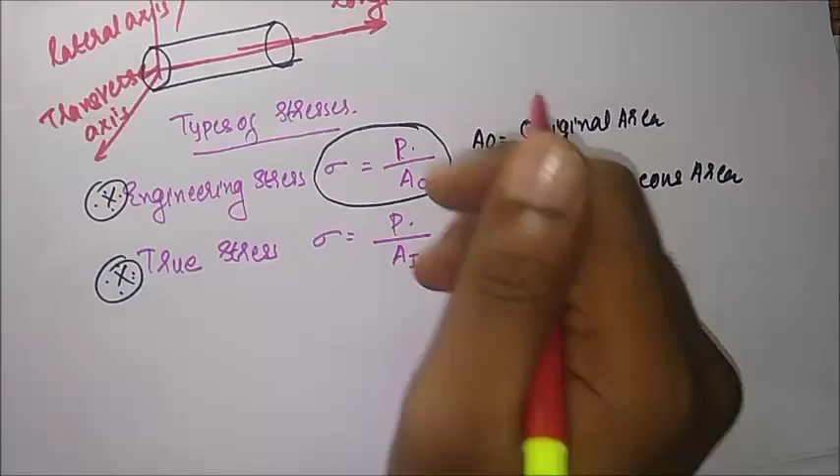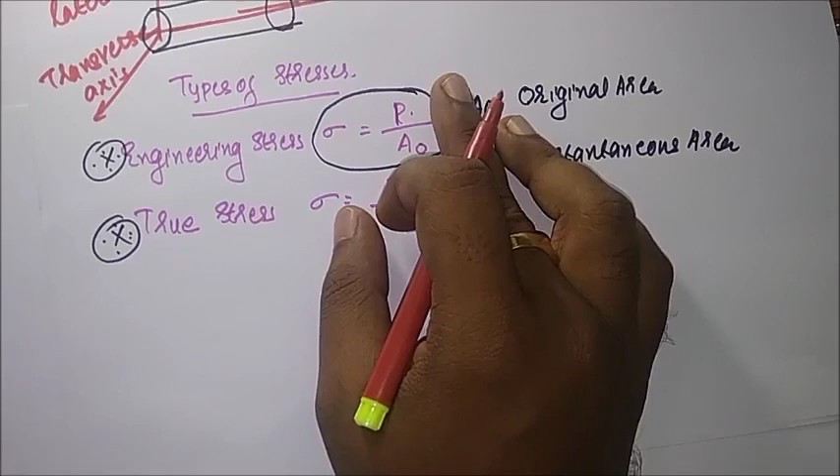In the previous video lecture, we studied what is stress, what is the unit of stress, what is engineering stress, what is true stress, what is the difference between pressure and stress, etc. Today we are dealing with what are the types of stresses.

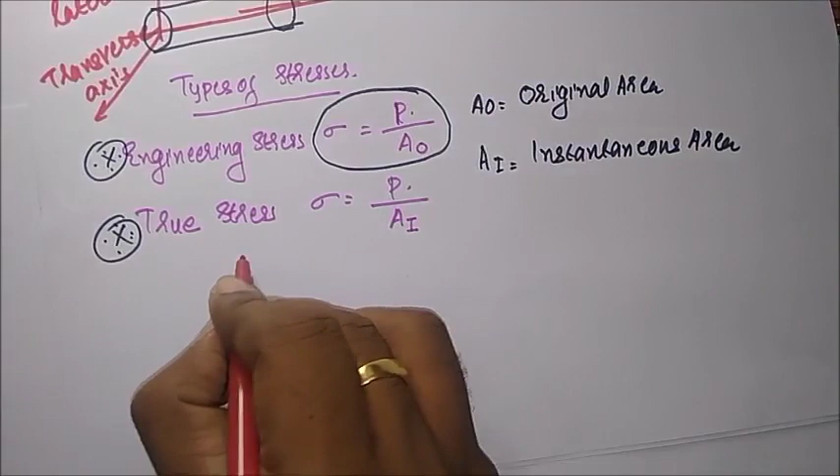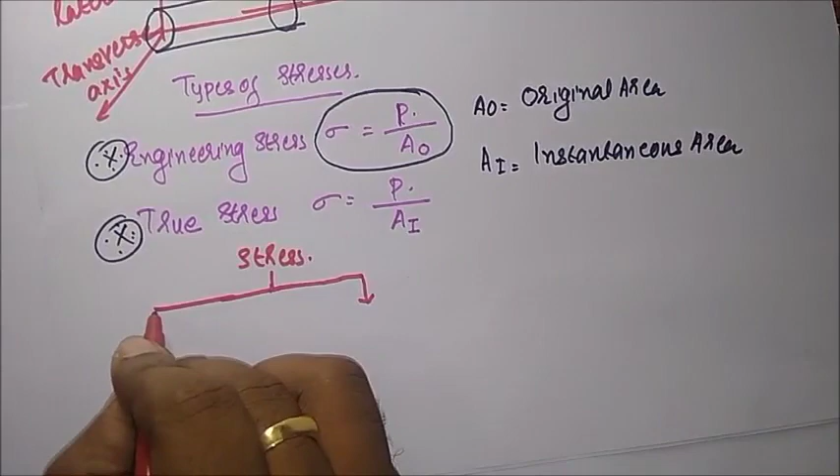What are the types of stresses? The stress can be broadly classified as normal stress and tangential stress. So stress is broadly classified into first one normal stress, second one tangential stress.

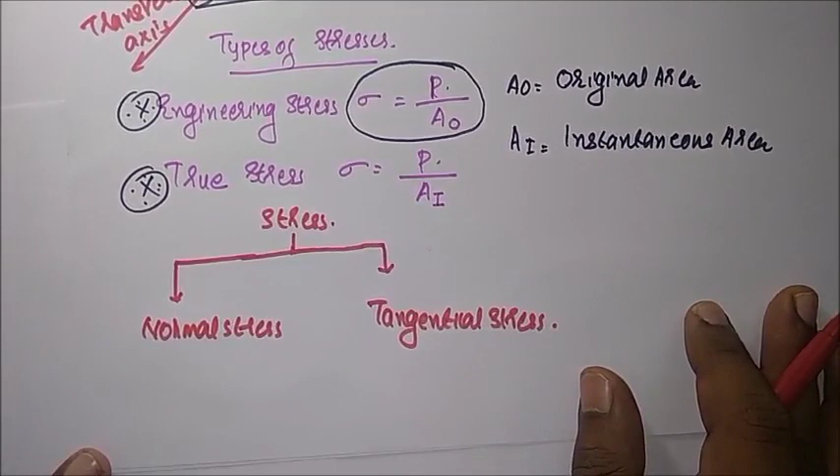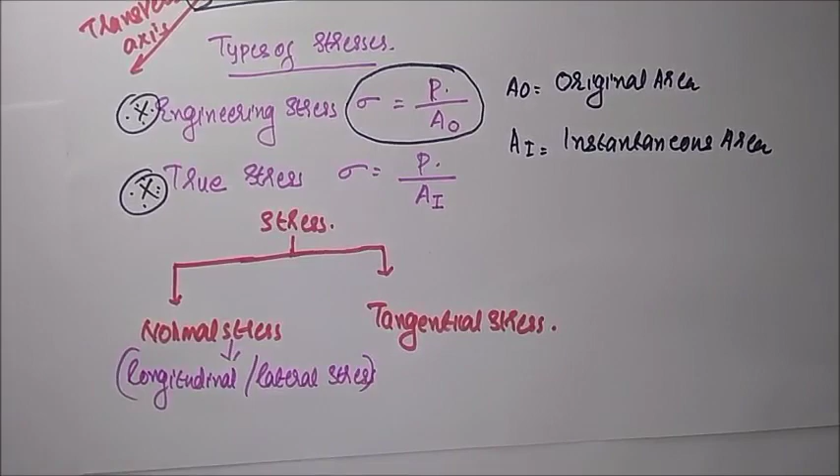Normal stress is also known as longitudinal or lateral stress. Tangential stress is also known as shear stress.

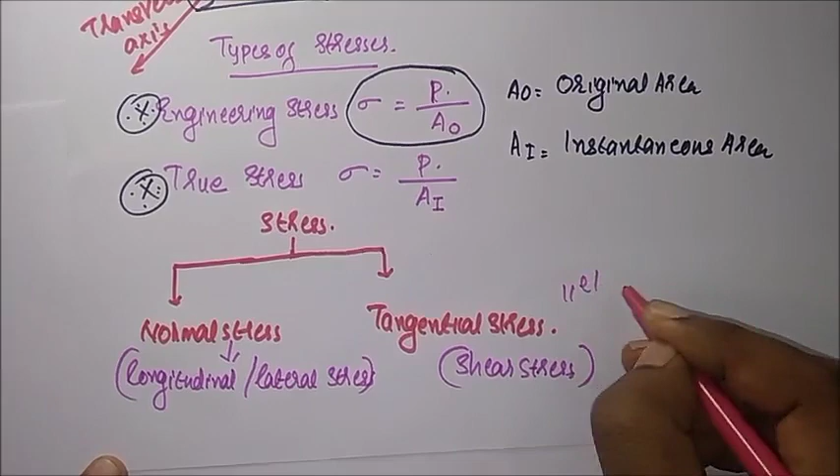What does normal stress mean? Stress acting normal to the surface is known as normal stress. Stress acting parallel to the surface is known as shear stress. The stress acting normal, that is perpendicular to the surface, is known as normal stress, and the stress acting parallel to the surface is known as shear stress.

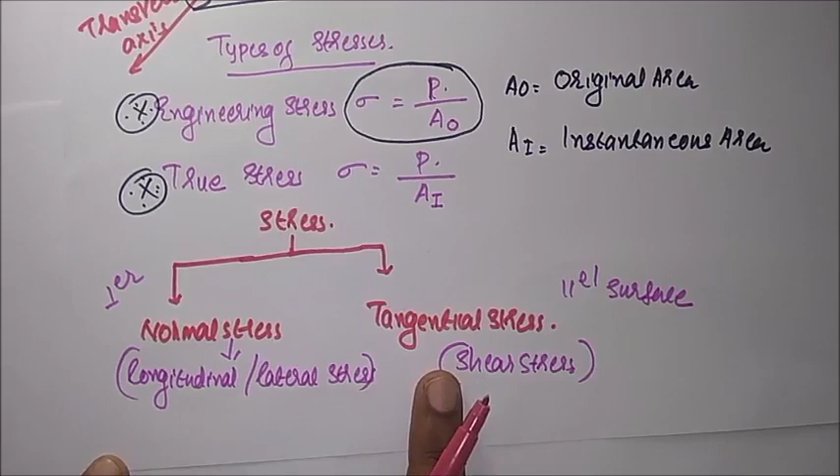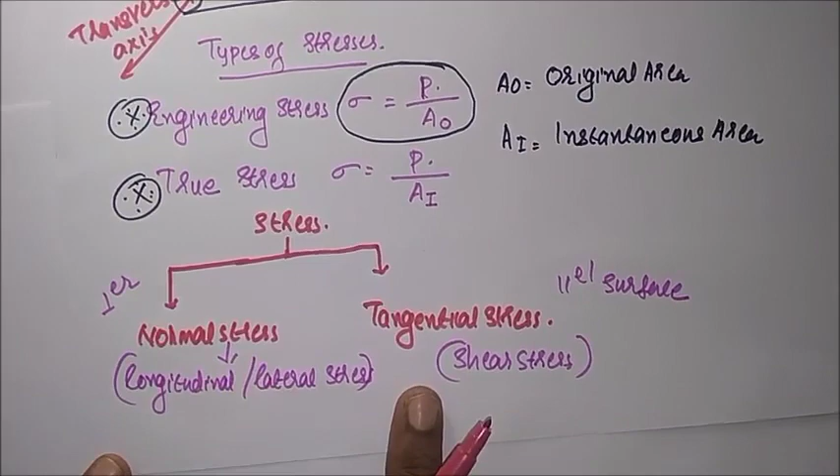This is the important difference between pressure and stress. Pressure is always acting normal to the surface only, but stress is acting normal as well as parallel to the surface. Stress acting normal to the surface is known as normal stress, and stress acting parallel to the surface is known as shear stress.

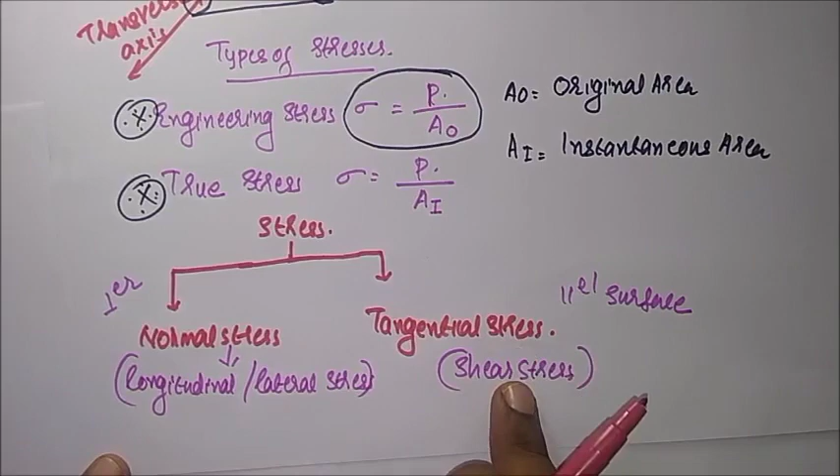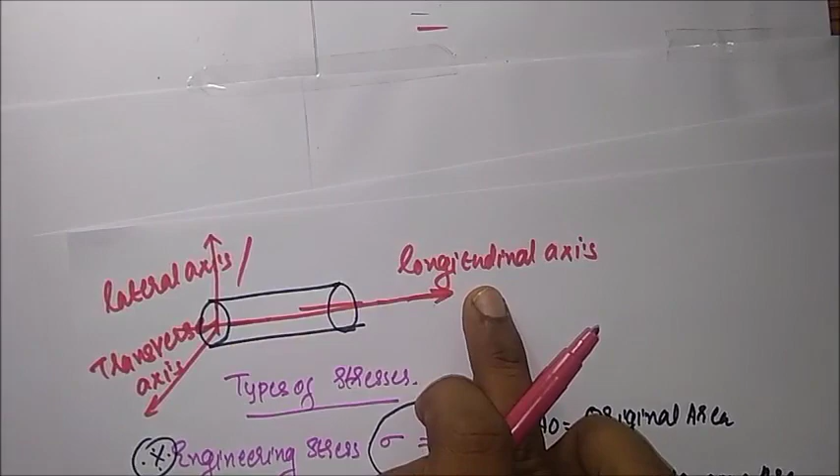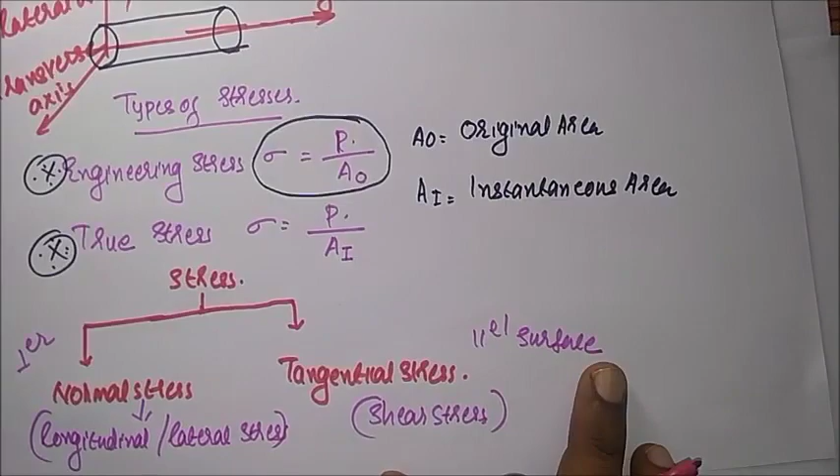Normal stress is also known as longitudinal stress and lateral stress. Stress acting normal to the surface along the longitudinal axis is known as longitudinal stress. Stress acting along the lateral surface is known as lateral stress, that is, normal to the lateral surface. When stress is acting parallel to the surface, it is known as tangential stress or shear stress.

First one, normal stress. Stress acting normal to the surface or perpendicular to the surface is known as normal stress. Then what are normal forces? Tensile force and compressive force are normal forces.

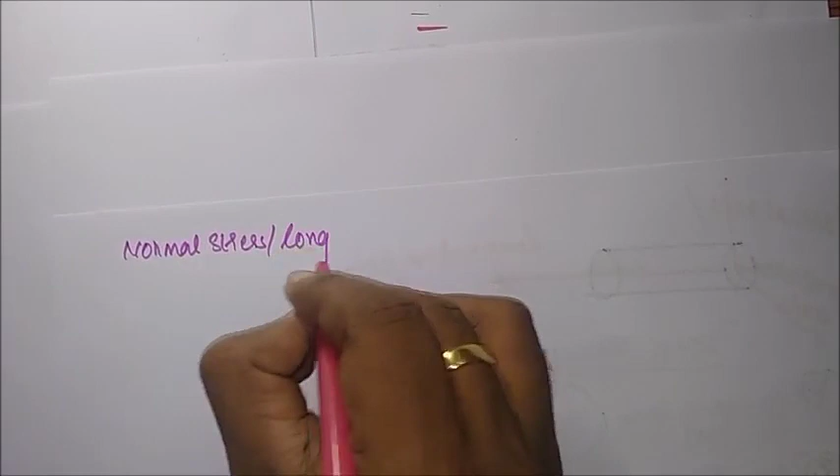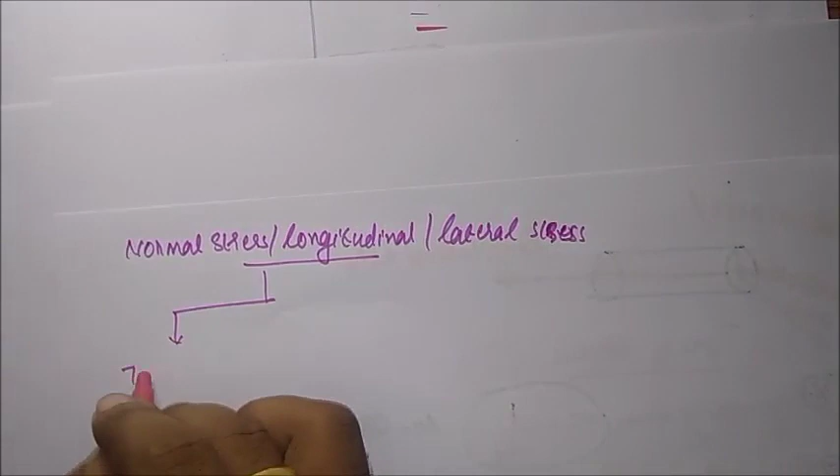Therefore, normal stress is again classified: normal stress is also known as longitudinal stress or lateral stress. Longitudinal stress can again be classified into tensile stress or compressive stress.

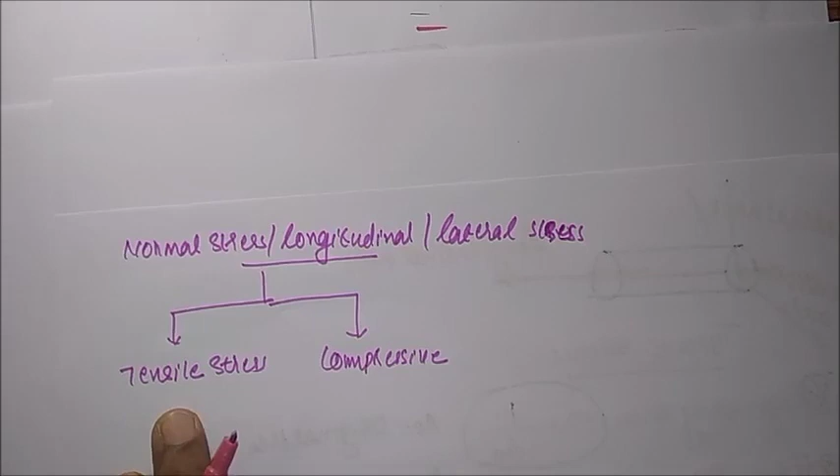Compressive stress: stress induced in the member due to tensile load is known as tensile stress, and stress induced in the member due to compressive load is known as compressive stress.

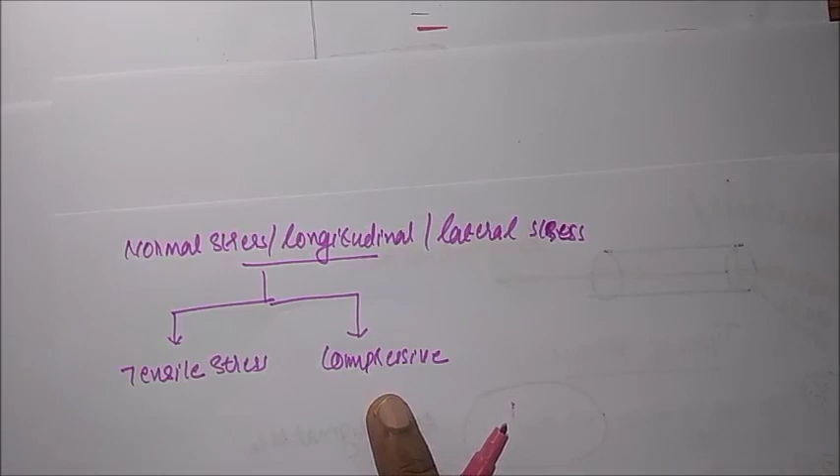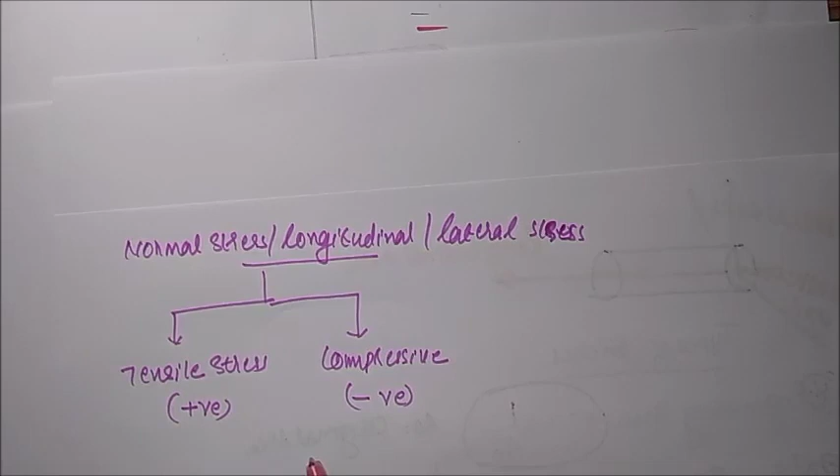Tensile stress is generally taken as positive, and compressive stress is generally taken as negative. So stress can be broadly classified into first one normal stress, next one tangential stress or shear stress.

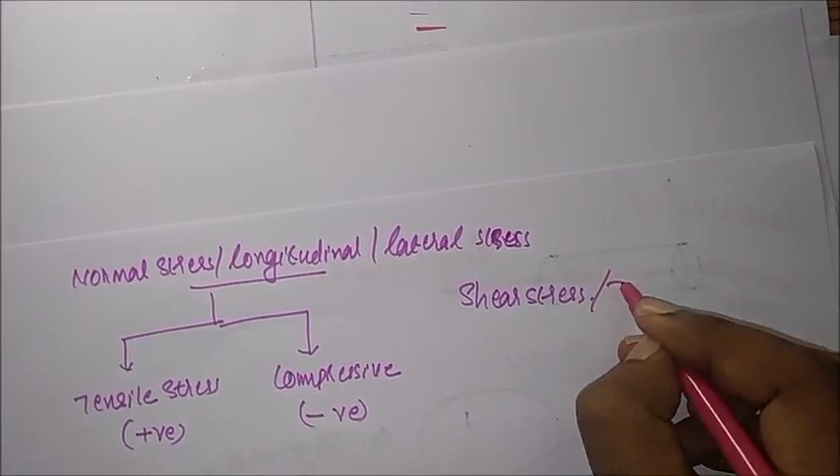Next one, shear stress, or tangential stress.

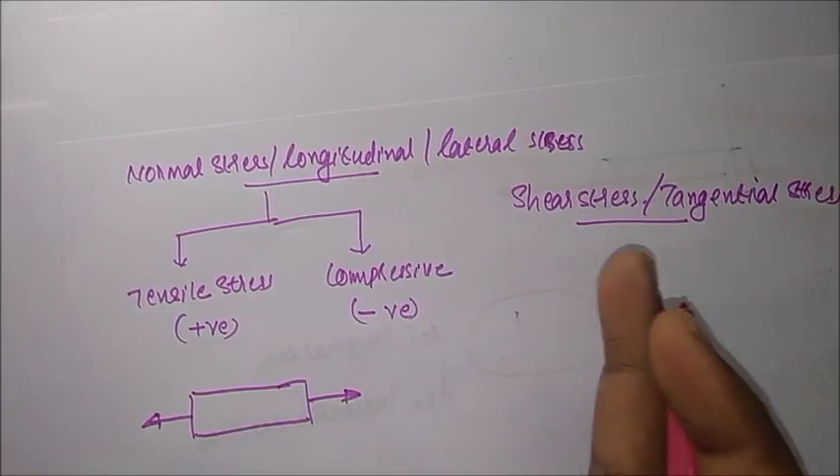In the case of both tensile and compressive stress, what will happen? Which type of load is applied in the member? If it is tensile force, the stress induced in the member is tensile stress. When force is acting towards the body, the nature of force is known as compressive force, and the stress developed in the member is known as compressive stress.

Both the tensile and compressive are collinear forces.

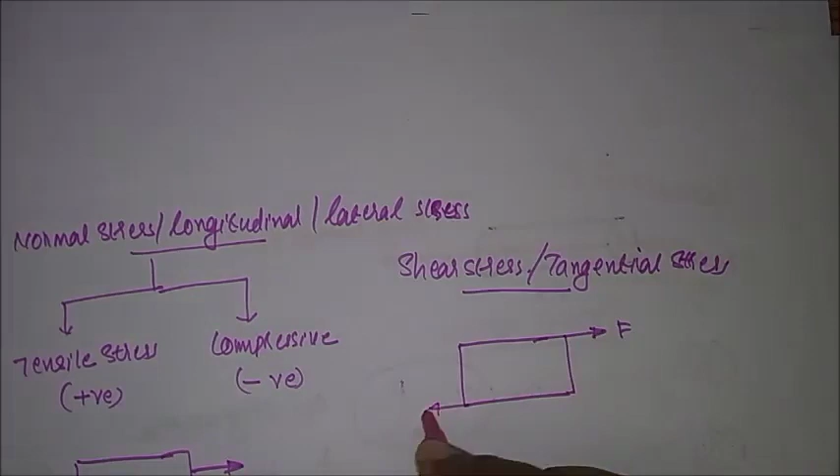But in the case of shear stress, consider a body which is acted upon by two forces, F, having the same magnitude, acting at the top and bottom layer. Consider a layer, consider a section line.

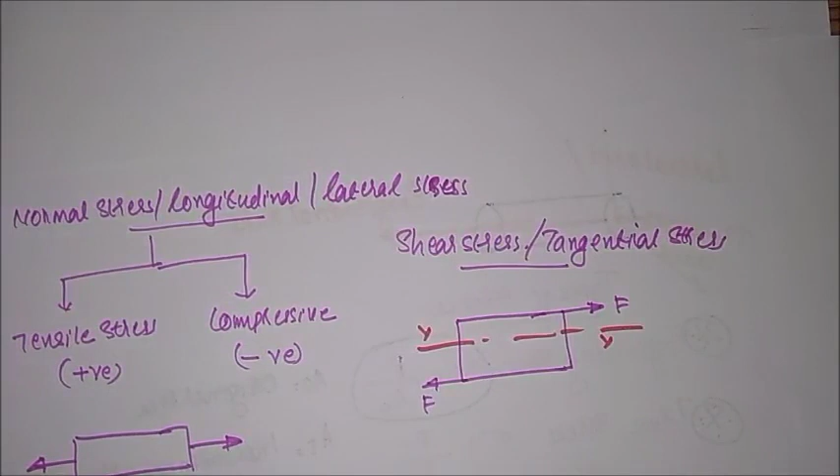Consider a section line YY. In the previous two cases, two equal and opposite forces are applied along the same line, or these two forces are collinear in nature.

Now, in this case, the same force is applied on the body along two parallel directions as shown in the figure. Two forces are applied: first one at the top layer and second one at the bottom layer, in two parallel directions. Then what will happen? Now one part of the body tends to slide over the other.

One part of the top side of the body makes slides over the other part, that is, top part slides over the bottom part. Then a shearing effect will take place when two equal and opposite parallel forces act which are not in collinear nature. Then a shearing action will take place.

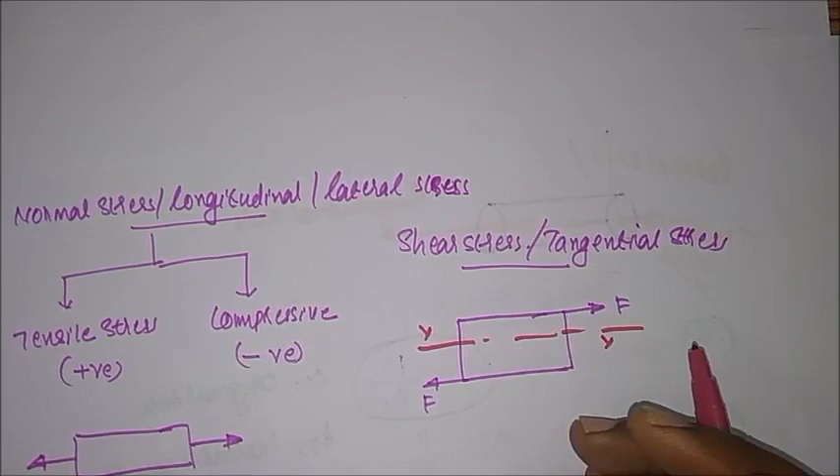The nature of this force is known as shear force. Along the YY plane, a shearing action takes place, that is known as shear force, and the corresponding stress induced in the member is known as shear stress or tangential stress.

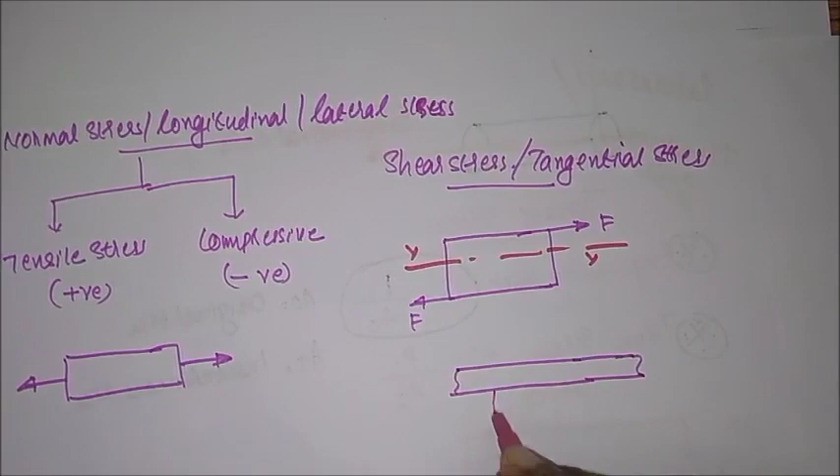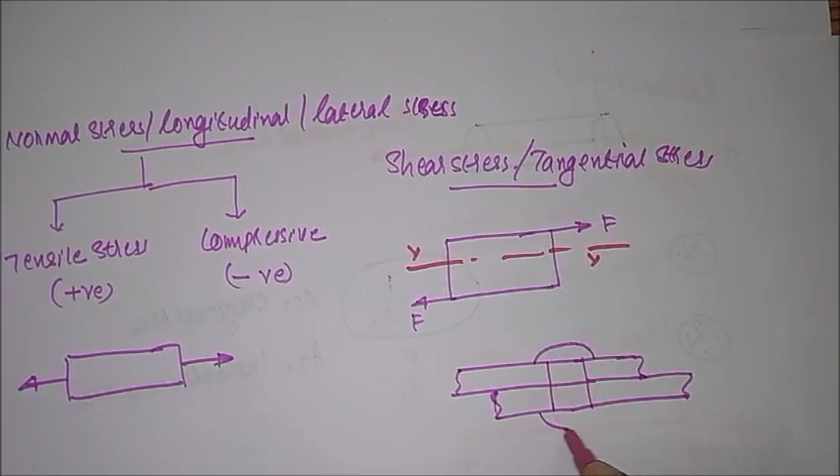Shear failure is very common in the case of riveted joints. There are a lot of mechanical joints: welded joint, soldering, brazing, like that. The riveted joint is one of the mechanical joints. We can join two parts by a rivet, that is a rivet head. You will study this topic in detail in machine drawing. This is a rivet head joining two parts, equal to 1 and 2.

Suppose the bottom part is applied by a force F and the top part is applied by a force. The same case happens here: two equal, opposite and parallel forces act on the top and bottom plate. This plate will move in the leftward direction and this plate will move in the rightward direction. Then the rivet head will damage due to the shearing action.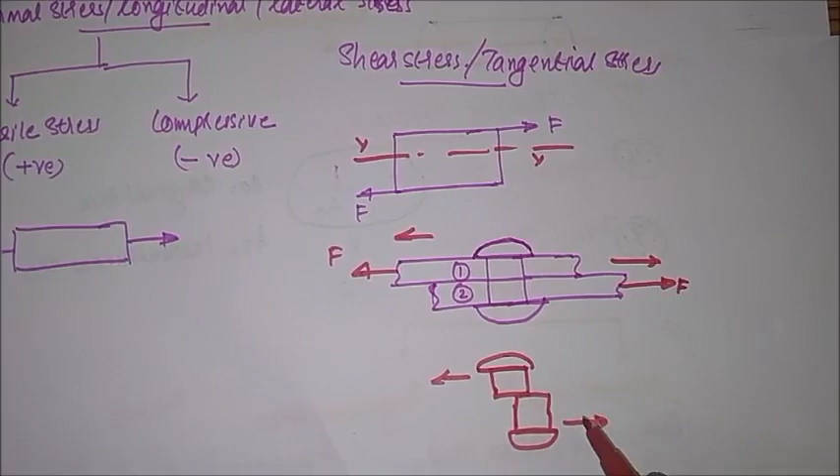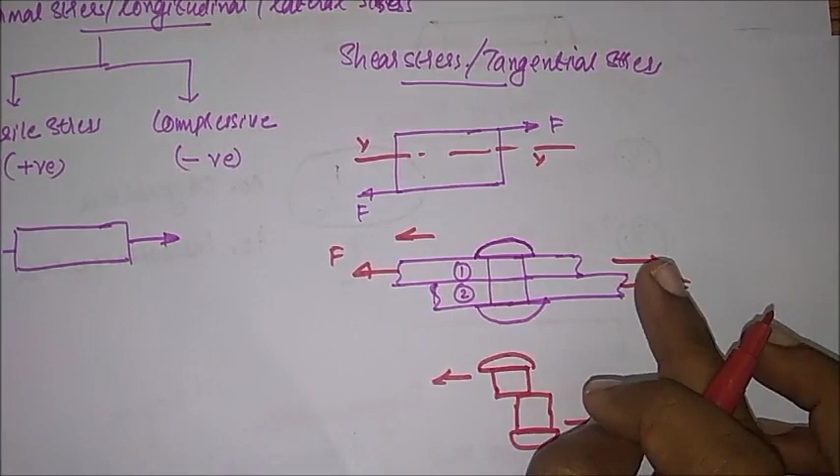The rivet head will damage due to the shearing action, moving towards the leftward direction on one side and the rightward direction on the other. That is known as shear stress, where two equal, parallel and opposite forces are applied along two parallel directions as shown in the figure. One part of the body tends to slide over the other part, or shear off, or a cutting action takes place.

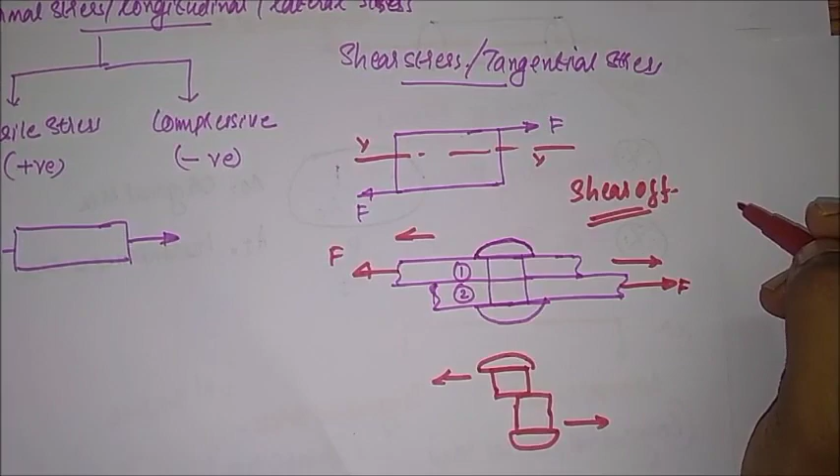That type of force is known as shear force, and the stress induced in the member due to the shear force is known as shear stress. Shear stress is denoted by the letter tau. Tensile and compressive stress are both represented by the letter sigma.

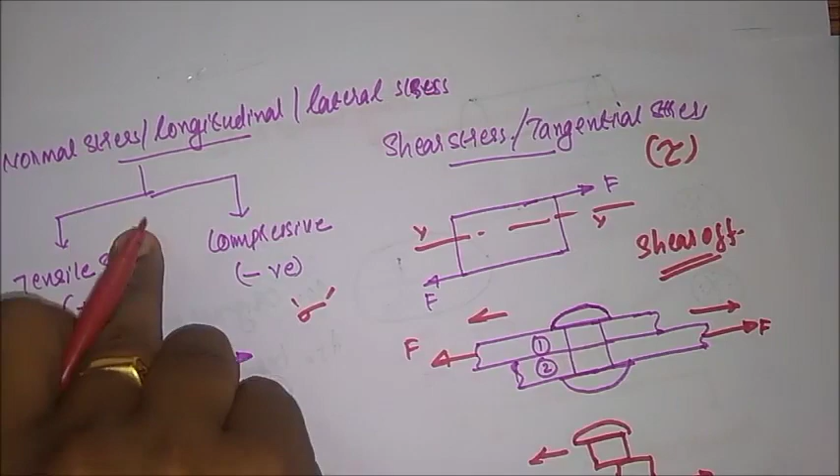What is the unit of stress? That is Newton per meter square, or Pascal. Tensile stress and compressive stress are represented by the letter sigma, and both are longitudinal or lateral stress. Shear stress is represented by the letter tau.

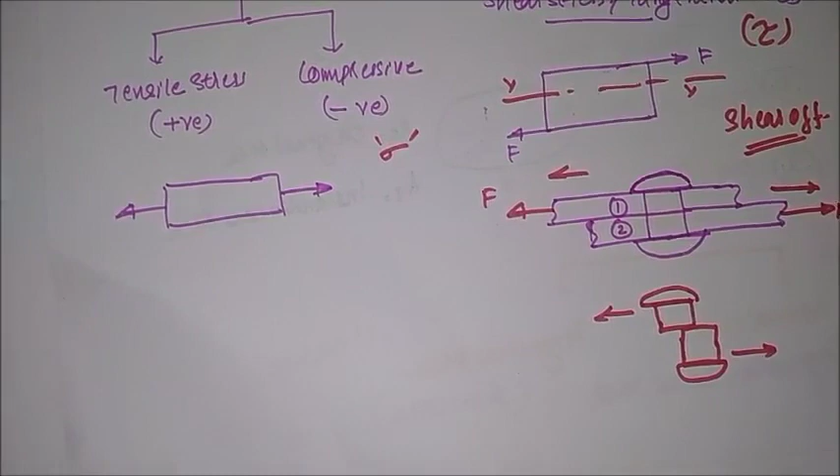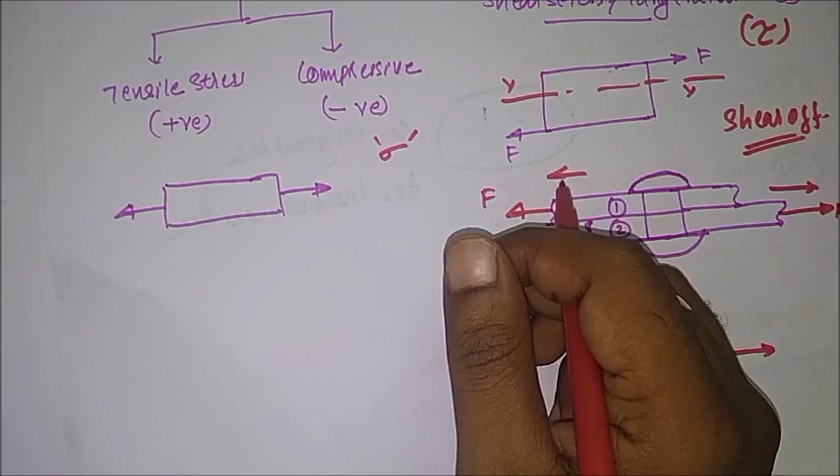Now we can move on to another topic known as strain. What is strain? It is the change in dimension to the original dimension of the body, which is known as strain.

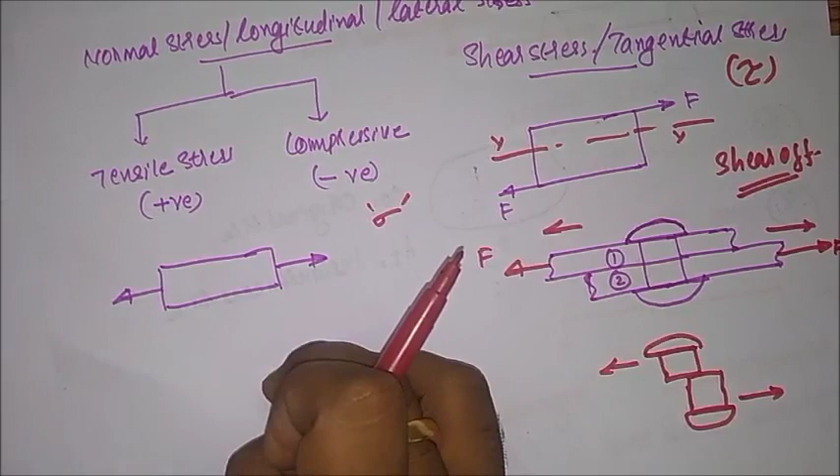When an external load is applied to the member, consider a body, it will get deformed. The ratio of change in dimension to the original dimension of the body is known as strain induced in the member. Strain can be broadly classified, first one being longitudinal strain.

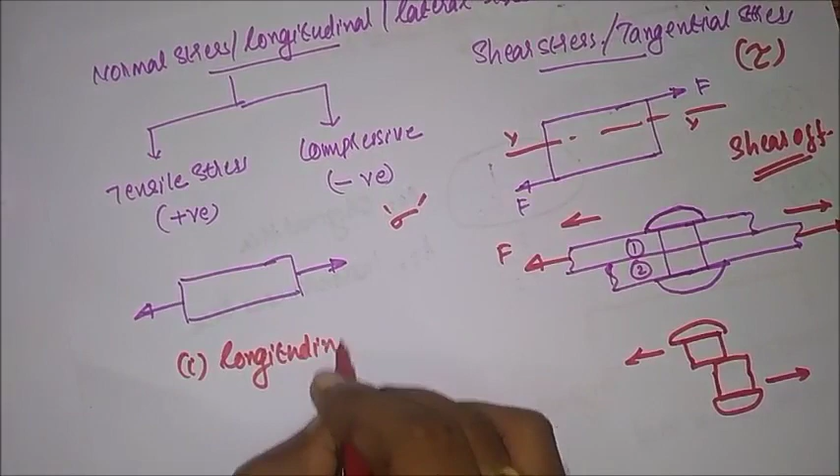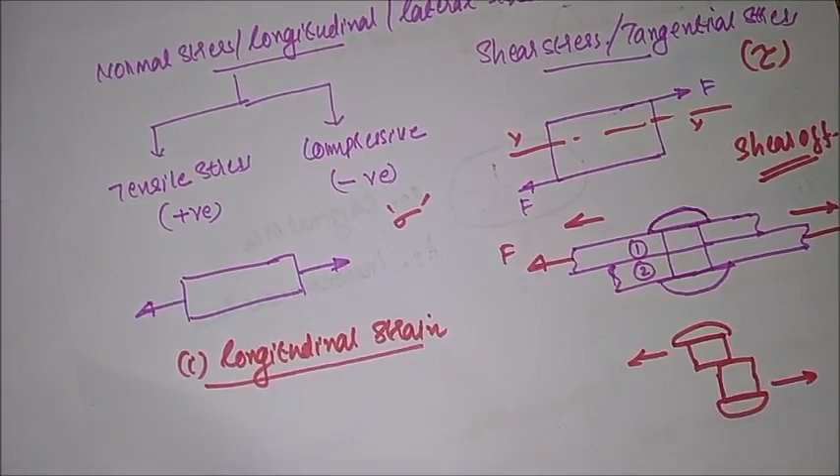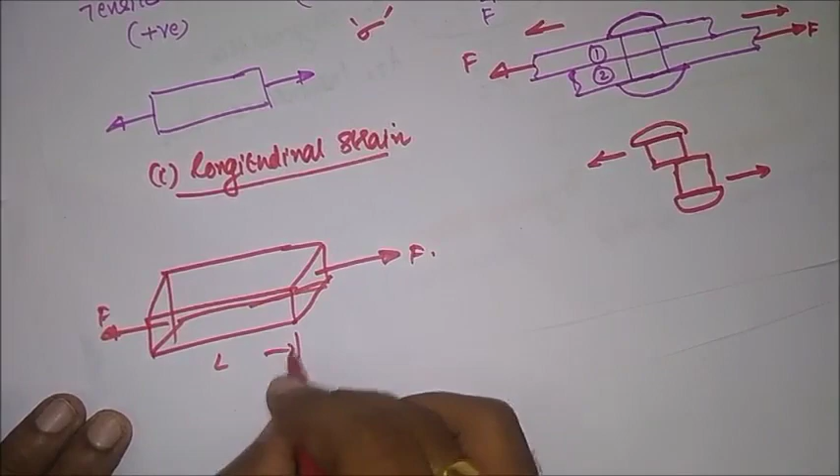What is strain? Change in dimension to the original dimension of the body, which is known as strain. First one, longitudinal strain. Consider a body where tensile load is applied. This is the length of the member, that is the width of the member, that is the thickness of the member.

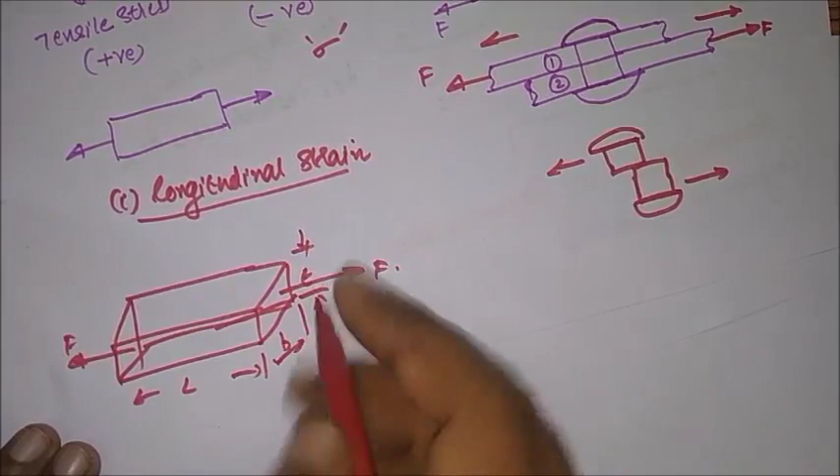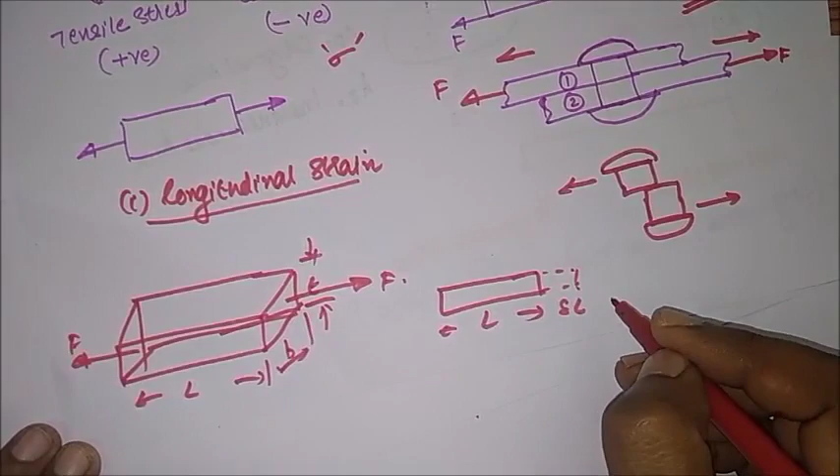Longitudinal strain means lengthwise dimension, which is known as the longitudinal direction. Strain means change in dimension to the original dimension. Suppose L is the original length; when load is applied, suppose this much deformation takes place, that is equal to delta L.

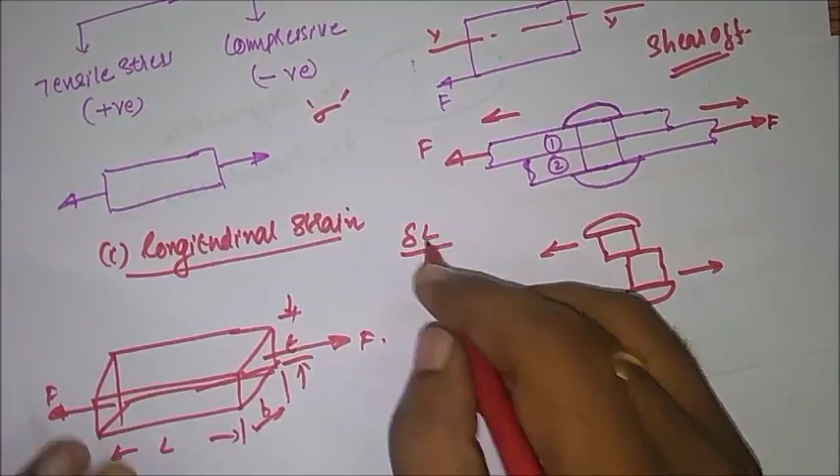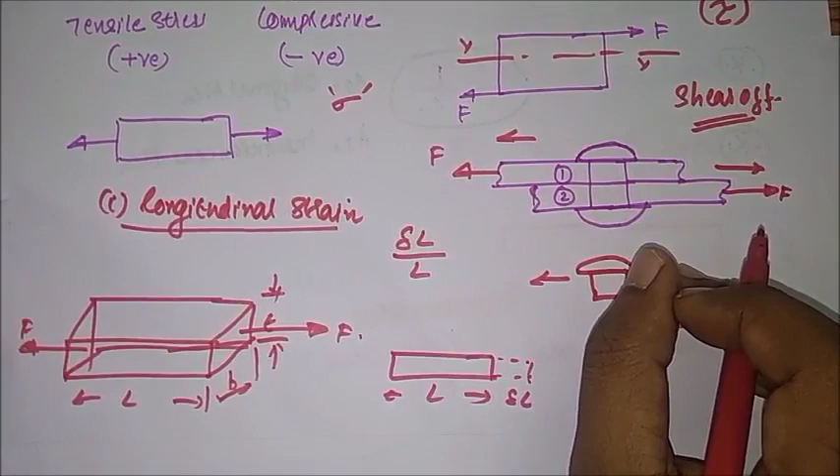So longitudinal strain is equal to change in longitudinal dimension to the original longitudinal dimension. What is longitudinal strain? Change in longitudinal dimension to the original longitudinal dimension is known as longitudinal strain.

Second one, lateral strain. What is lateral strain? Change in lateral dimension to the original lateral dimension is known as lateral strain.

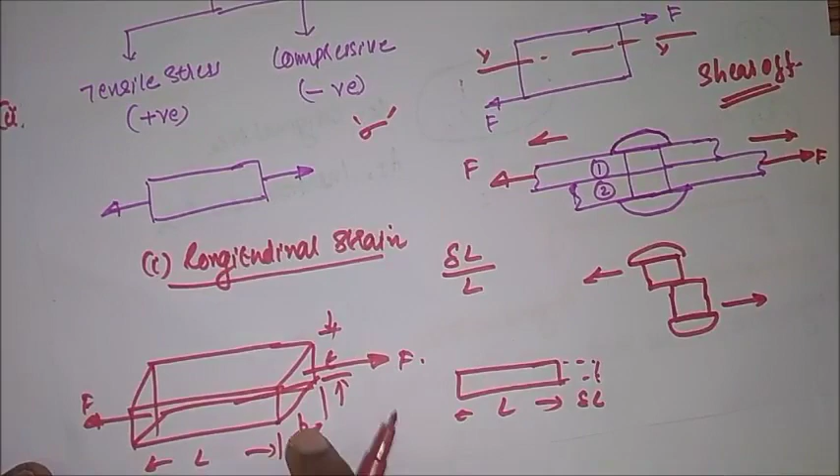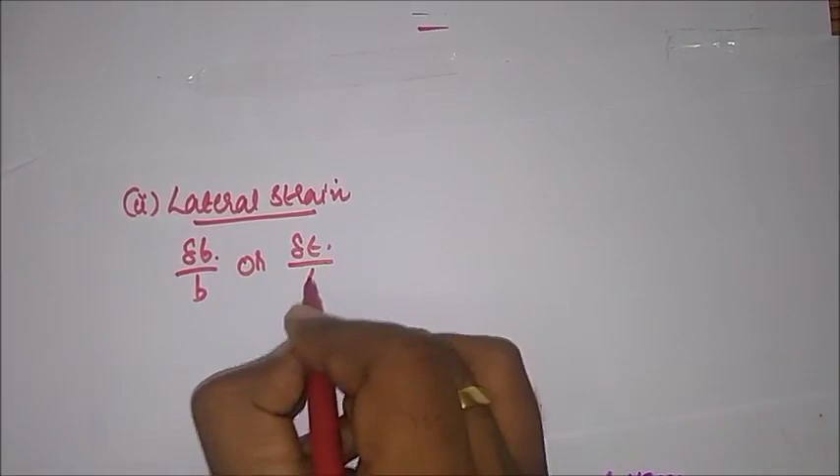That is lateral direction. What is the lateral direction? Length is the longitudinal direction, while width and thickness are lateral directions. Therefore, lateral strain is equal to delta B by B, change in lateral dimension to the original lateral dimension, or delta T by T. Width and thickness are both lateral dimensions. Change in lateral dimension to the original lateral dimension is known as lateral strain.

Change in lateral dimension to the original lateral dimension is known as lateral strain, that is delta B by B or delta T by T. Change in longitudinal dimension to the original longitudinal dimension is known as longitudinal strain.

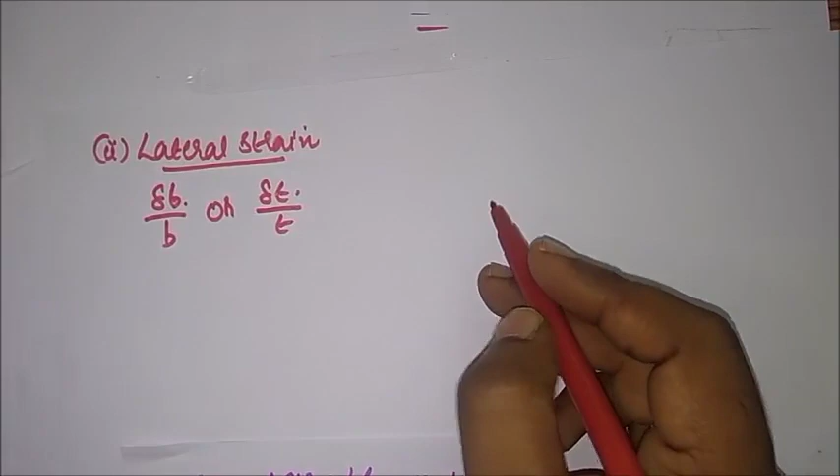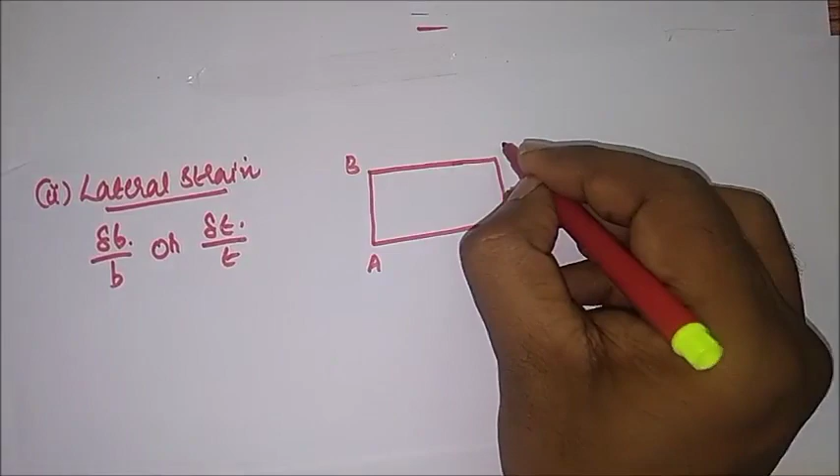Next, what is shear strain? Consider a body ABCD which is fixed at the bottom. When an external force is applied to the member tangentially, that tangential or parallel force is known as shear force.

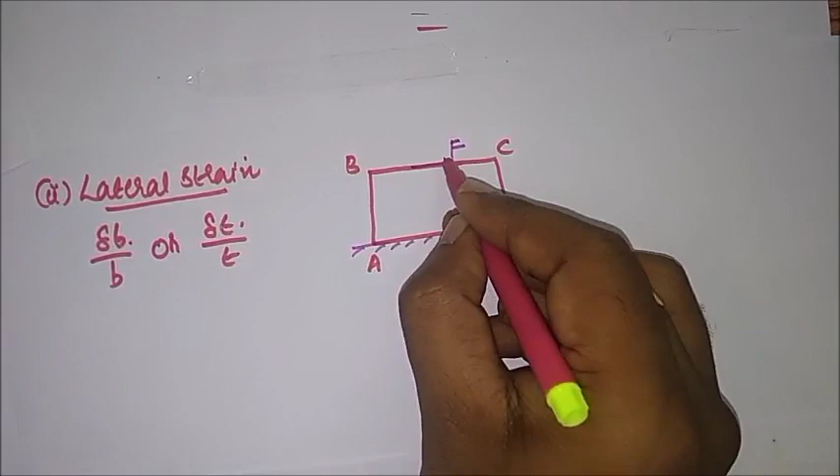The top layer will slide towards the rightward direction. That is, B is shifted to B dash, C is shifted to C dash, while the bottom layer remains fixed. So BC is changed to B dash C dash, and some angular change takes place, suppose that is equal to phi.

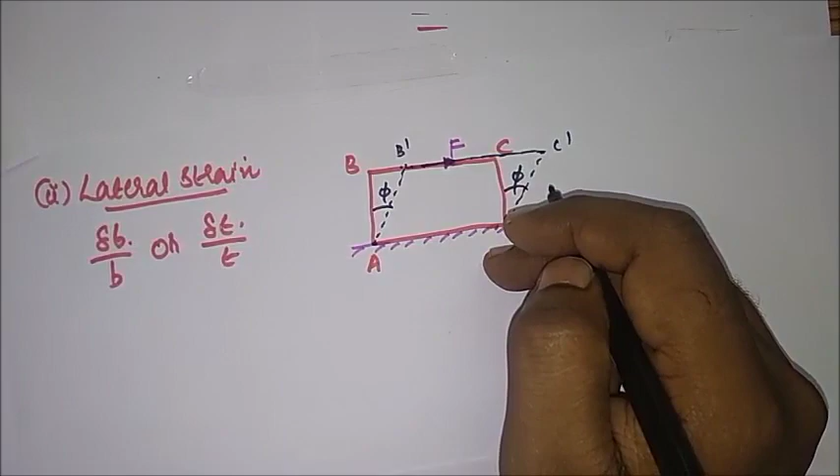Consider an element ABCD subjected to a shear stress on the top face and bottom face. The element ABCD undergoes deformation in a different way, and is deformed to A, B dash, C dash, D.

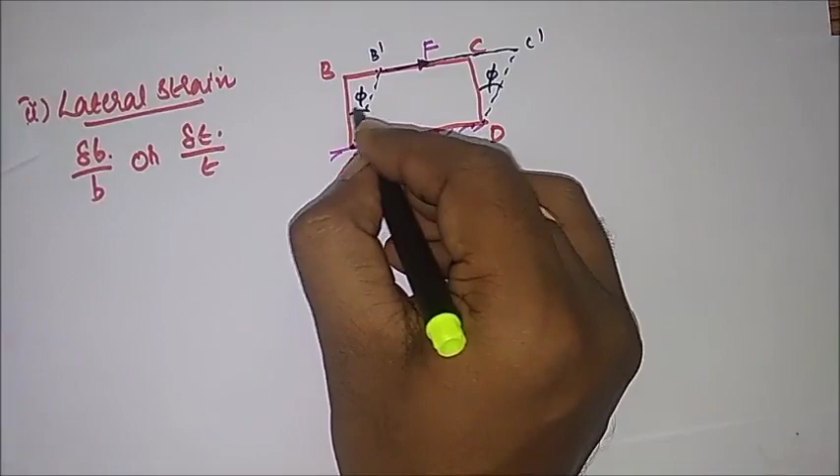Then shear strain is equal to phi. Shear strain phi is equal to angle, which is arc divided by radius. That is, phi is equal to shear strain equals BB dash divided by AB, which is equal to tan phi.

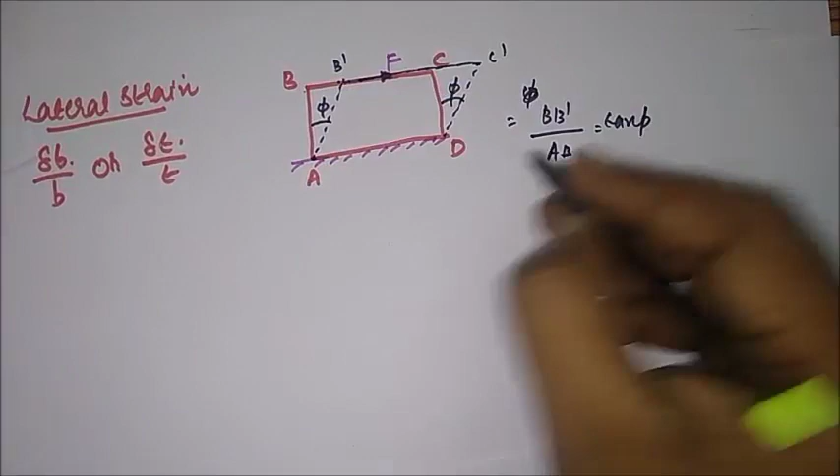Tan phi is equal to tan theta, which is opposite side divided by adjacent side, that is BB dash divided by AB. Tan theta is equal to opposite side divided by adjacent side, that is BB dash divided by AB. For small angle, tan phi is approximately equal to phi.

Therefore, phi is equal to BB dash divided by AB. That value is known as shear strain, represented by phi.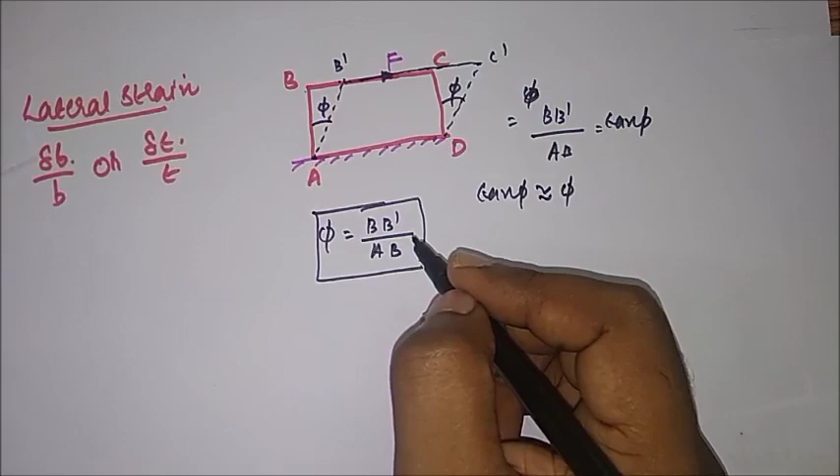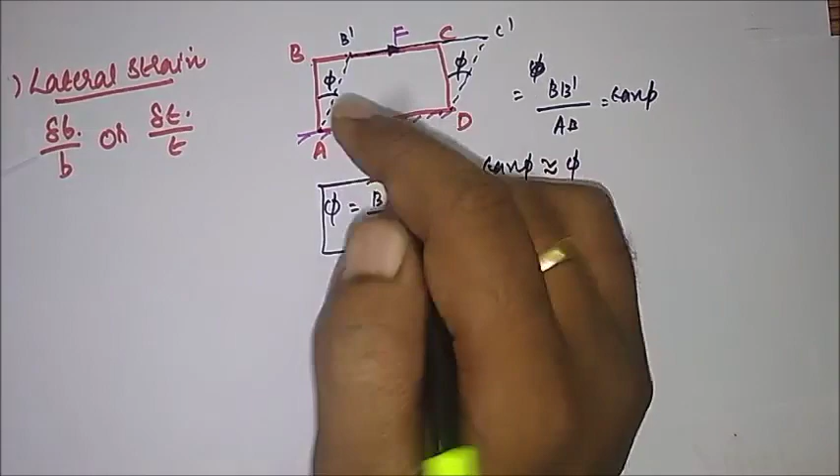Consider an element ABCD subjected to shear stress at the bottom and top layer. On these faces, the element ABCD undergoes deformation and is deformed to A, B dash, C dash, D, with some angular change taking place. The deformation is expressed in terms of angular displacement.

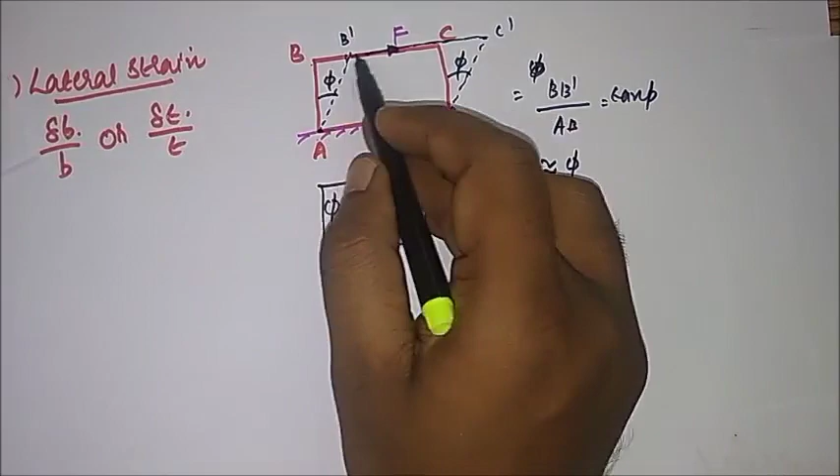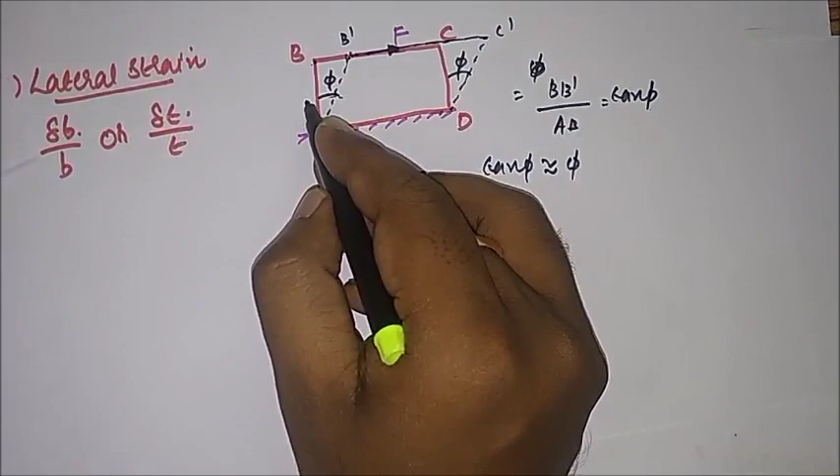The displacement of B dash is represented in terms of angular displacement, that is BB dash divided by AB, since B is changed to B dash. This is equal to tan phi, which is opposite side divided by adjacent side, that is BB dash divided by AB, equal to tan phi.

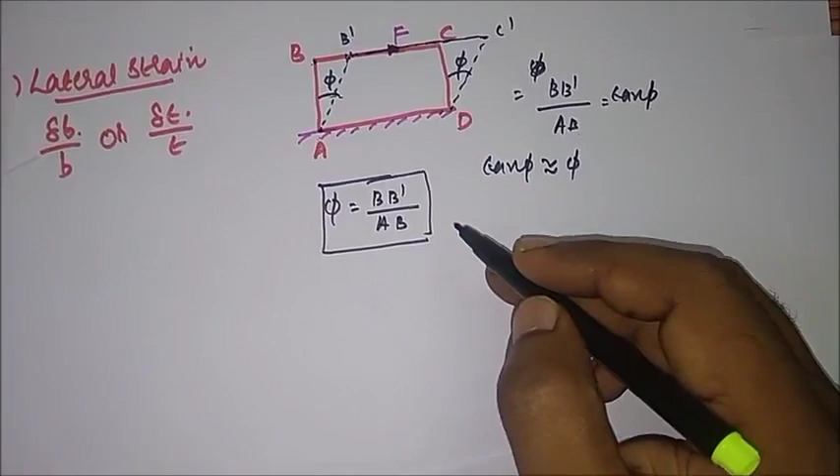For small angle, tan phi is approximately equal to phi, that is BB dash divided by AB, which is known as the shear strain induced in the member.

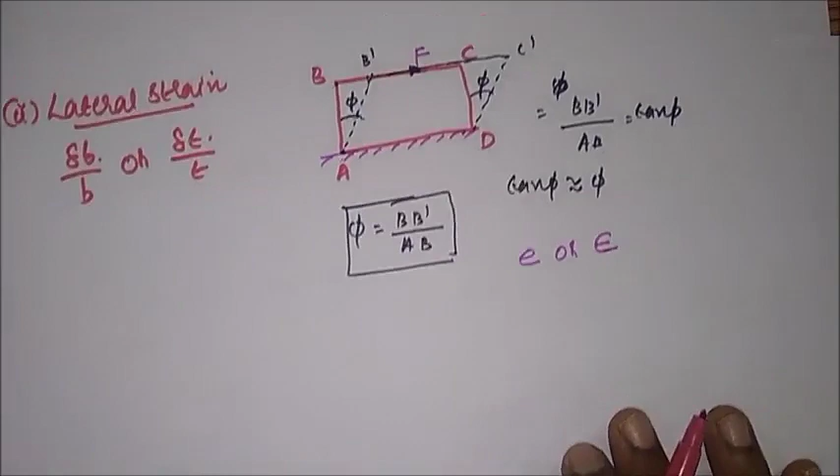Strain is generally represented by the small letter E or epsilon. Longitudinal strain and lateral strain are represented by E or epsilon, and shear strain is represented by the letter phi.